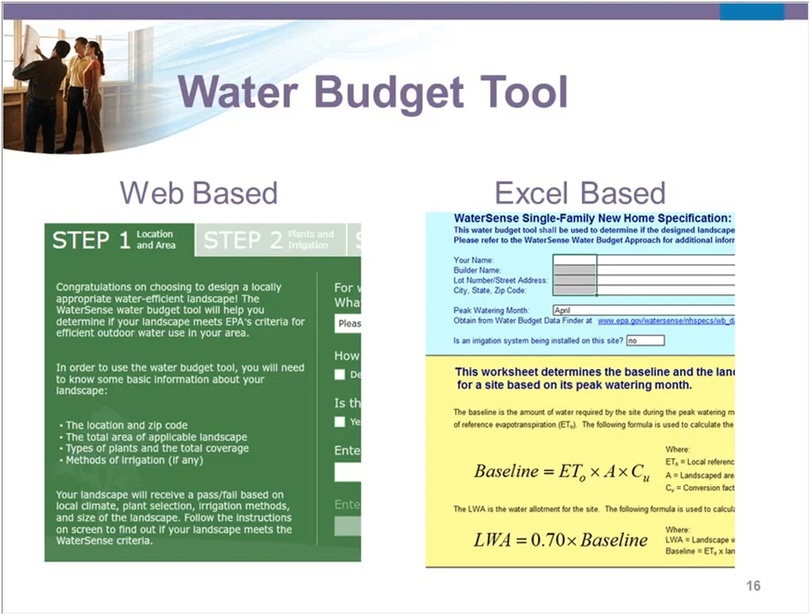The budget takes into account the plant types, the plant water needs, irrigation system design, and the applied water that the landscape receives either by irrigation or by precipitation. So all of these factors are taken into account.

The tool, in a nutshell, follows three main steps. The first step, the tool calculates the amount of water a standard landscape would require and the amount of water the design landscape is allowed in order to be considered water efficient.

So in other words, how does the reference landscape compare to the design landscape? That's what we do in step one. Next, the tool calculates how much water the design landscape requires based on climate, plant type, and the irrigation system design. And lastly, it determines whether the design landscape meets EPA's criteria.

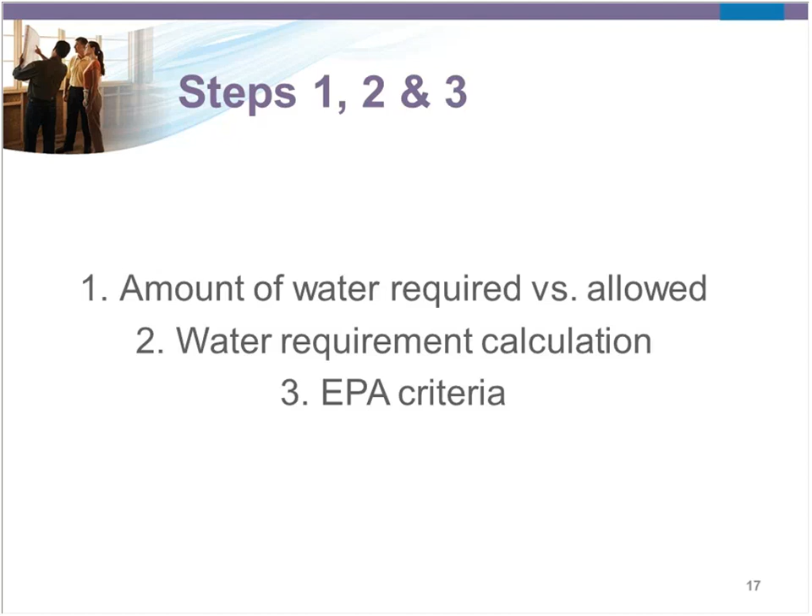Essentially, we're trying to see if the landscape really is meeting water efficiency standards. And we're going to talk in more detail about each of these steps. So what are some of the major factors that we take into consideration? There are two major climate-based factors, which are water use and performance.

So for comparison, through our products labeling side of the program, products in general must use less water while performing as well or better than the conventional models. So for instance, when we certify or label toilets, the requirement is that they become at least 20% more water efficient while still performing just as well as a standard toilet.

And so following this model, performance of the landscape can be judged by the presence of healthy plants and, of course, the ability to meet expectations for both how the landscape is functioning and the way that it looks, so all of its aesthetic effects. One thing that is very important to note is that every plant will have access to the water that it needs. Otherwise, that's going to affect both the aspect of performance and of aesthetics.

So we want to make sure that even though we are being water efficient in the landscape, we're still providing enough irrigation so that we have green plants.

For the purpose of this specification, it was decided that we would implement this through a performance-based compliance approach, that way allowing more flexibility and ease of meeting the criteria.

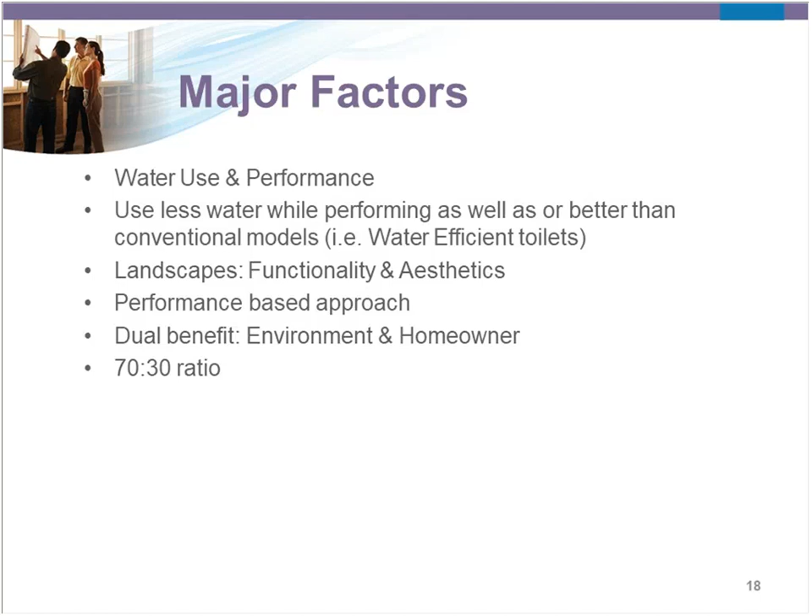And finally, the data are conservative in nature in order to result in a landscape that's capable of withstanding the most challenging months of the year. So though we're wanting to save water, we don't want the landscapes to burn out in the hottest months throughout the summer.

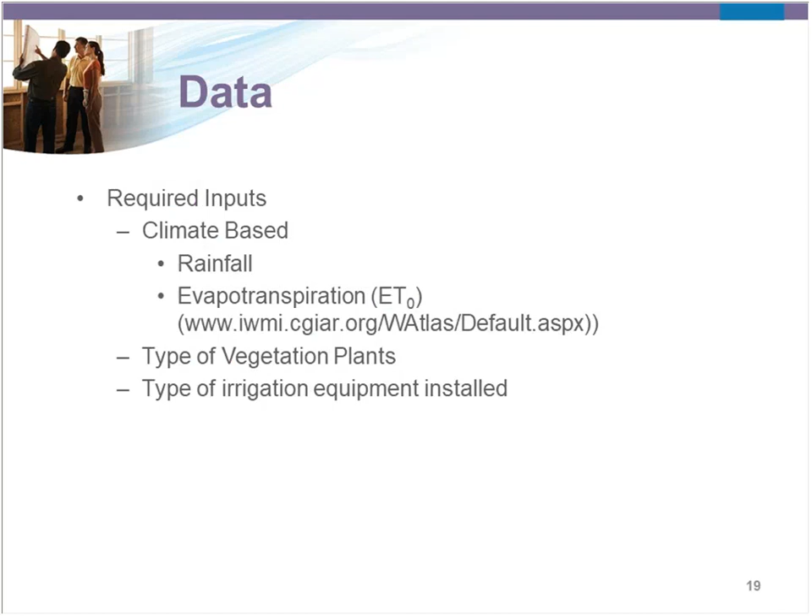So looking into the data, what are the required inputs that the tool functions on? The two climate-based inputs are rainfall and ET. ET is captured at IWMI, that's where we obtain the national values for ET. And these two climate inputs are local reference for every region. The tool also, of course, considers the type of vegetation and the type of irrigation equipment that is installed.

So a little bit more about ET. One of the things that WaterSense took into consideration in order to make the tool easy to use was to have a standardized set of data that covered the entire country. So while we have access to local resources for rainfall data and other sorts of climate data, ET data sources are pretty scarce.

So we went to the International Water Management Institute, which is the website that you see here on this slide, and they have a climate atlas that has data ranging from 1961 to 1990 from weather station data across the world, and they model monthly summary data for a number of parameters, including ET in our case.

The US data that we extracted was summarized with the average value for each zip code using ArcGIS. And in order to be consistent in both the actual data and the process that we used to model it, we also extracted the precipitation data.

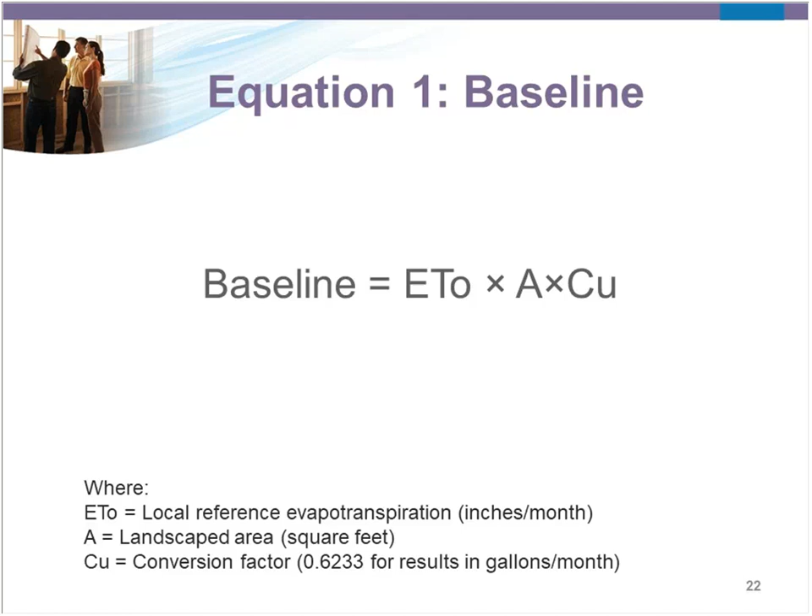So that's for our first step. Our second equation is the landscape water allowance, also LWA. We're basically multiplying the baseline, which we obtained from the previous equation, times 70%. What this equation results in is the amount of supplemental water that's allotted for the designed landscape.

For purposes of the specification of the LWA, 70% of the baseline is the amount of water that would be needed if the entire landscape was covered by a well-maintained, average height green grass. The water budget method assumes that all plants will require some amount of supplemental water.

We've just assumed that a landscape will have a variety of vegetation that have different water needs. And then for our third equation, this is the landscape water requirement. We'll go through all the variables quickly. The landscape water requirement for each hydrozone, which we'll explain a little bit later, is expressed in gallons per month.

Then we have our distribution uniformity, which is the lower quarter distribution uniformity. ET being the local reference evapotranspiration value. K, the landscape coefficient for the highest water-using plants in the hydrozone. R, the allowable rainfall, which we've designated as 25% as being the actual usable rainfall. And C being the conversion factor, so that we could have our results in gallons per month.

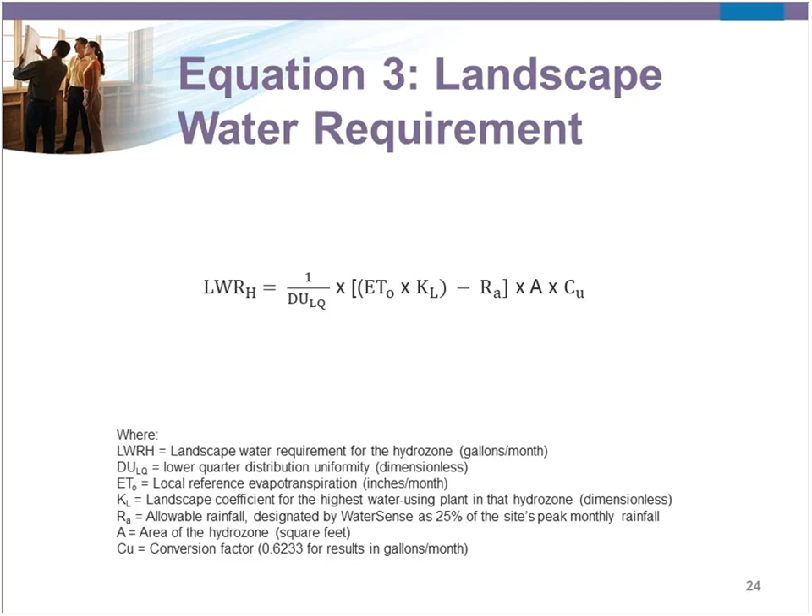So that is our final equation. Now we can move on into the actual demonstrations. First, we're going to go through a demonstration on our Excel-based tool, and then we'll do another demonstration on our web-based tool.

This is what the first page looks like for the Excel-based tool, for those of you who are familiar. The blue sections are usually the sections that require user input and basically contain default project information. The yellow sections are reference information, and gray sections, which we'll see in the next slide, are meant for input.

One nice thing about this tool in comparison to the web tool is that you get the opportunity to see the background information behind the tool and understand the more technical aspects of it, which is kind of nice.

Then you move on into the gray area where it's going to require all of the inputs. For step one, we're entering the landscape area in square feet. For the sake of the demonstration, we're working with a landscape of 5,100 square feet. Then we enter the average monthly reference ET, which in this case is 6.25. Within the tool, you'll find a link that will take you to the database where you can obtain that based on your location.

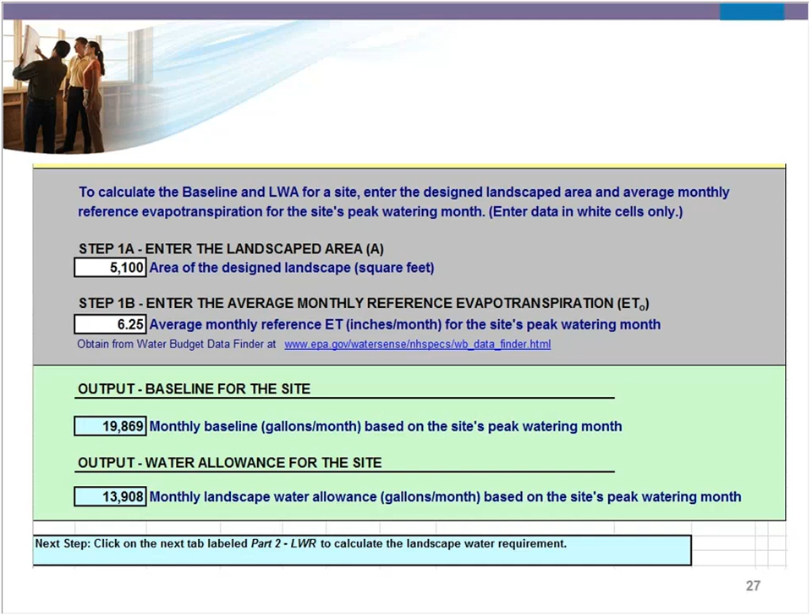Like it says here, it's based on the site's peak watering month, so this is the hottest month of the year. Then we move on to step two, where we're going to go ahead and calculate for our LWR, again based on our peak watering month.

The first entry that you make is enter the average monthly rainfall of the site. Again, the link is provided where you can obtain those data points. It's 1.68 for this specific site.

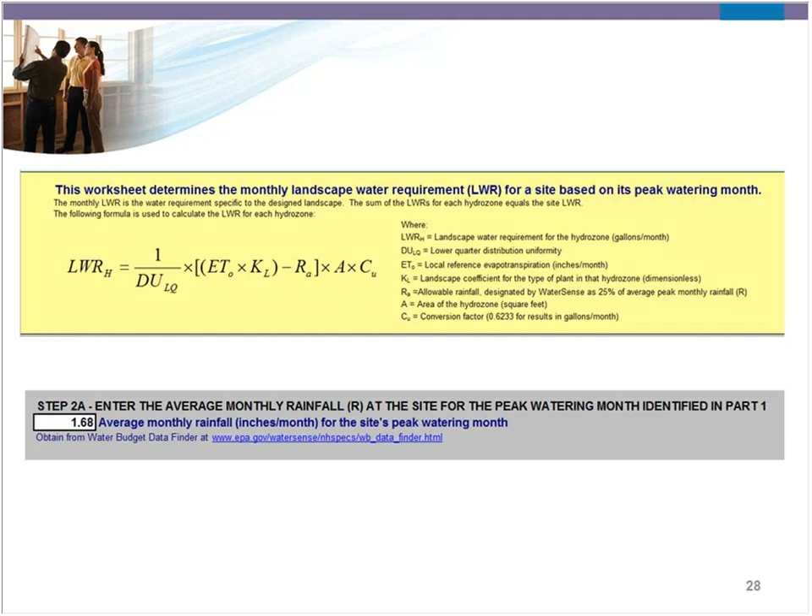Then it takes you to the second part of step two, which is to include all the different hydrozones that make up the entire landscape. Essentially, you're breaking up the square footage based on the type of landscaping that you have, and this number needs to equal your original landscape number that you put in step number one.

So here you have the opportunity to break it down. In this case, we have 2,438 square feet of turf grass with medium water requirements. The landscape coefficient for this is 0.7. The irrigation type is fixed spray. The DU is 65%, and it calculates the LWR for each specific hydrozone.

And so it continues to go down. We have a mixture of shrubs with low water requirements. Its K values — all of the shrubs have been assigned drip standard irrigation with DUs of 70%. And as you see, their LWR values.

And finally, this is sort of our backyard: 450 square feet of ground cover with low water needs at a 0.2 coefficient, also with drip irrigation, 70% DU, and then finally our turf grass. So like I said earlier, we calculate all of these totals and obtain one whole number for the landscape water requirement for the entire landscape.

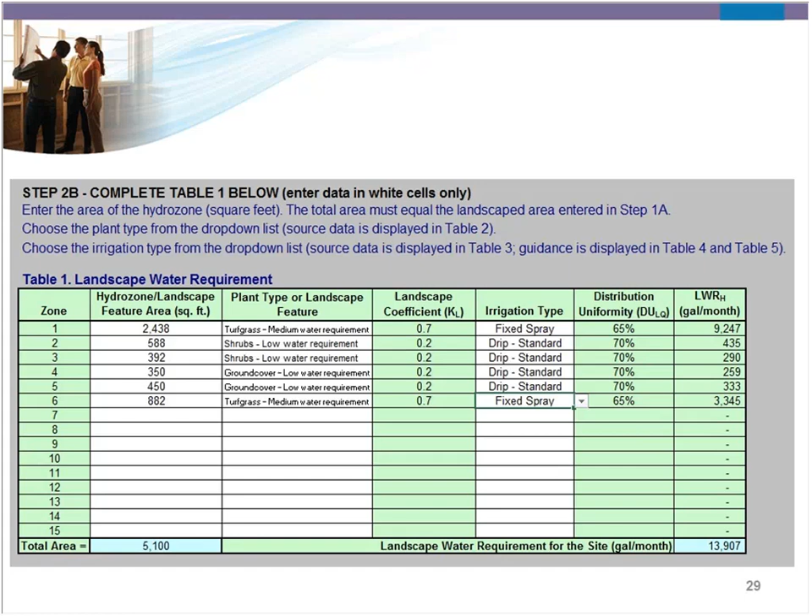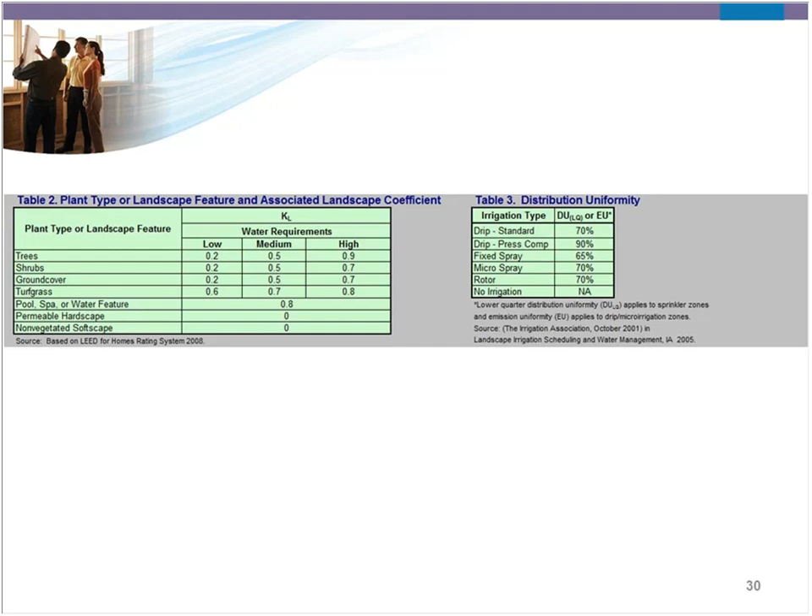Before we get our results — and this is only in the Excel version of our tool — you'll also have access to all of the tables and charts that break down the values that you're inputting in the previous table.

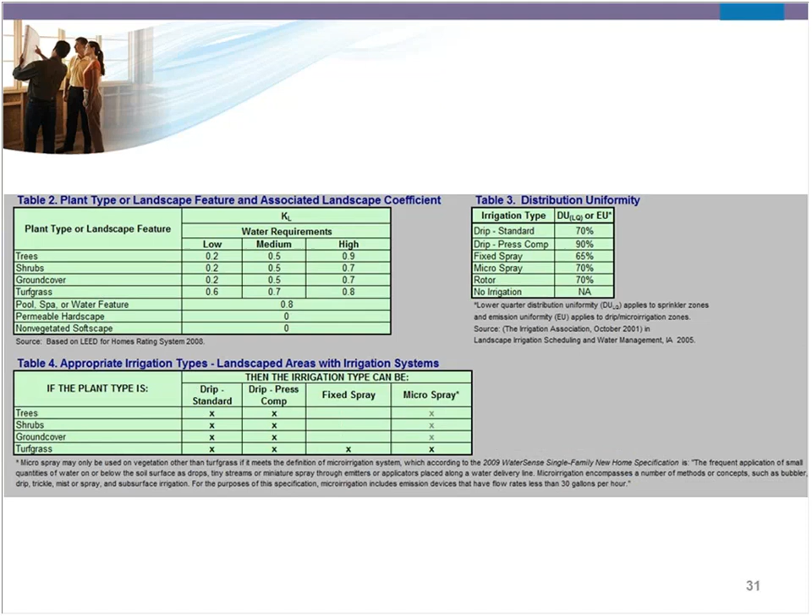Based on plant type, you find your K values. Based on irrigation type, you find your DU values, and then a reference table showing you the appropriate irrigation types for those areas that actually have irrigation systems. Based on all of those inputs, we get here our water requirement for the site, which is 13,907 gallons per month.

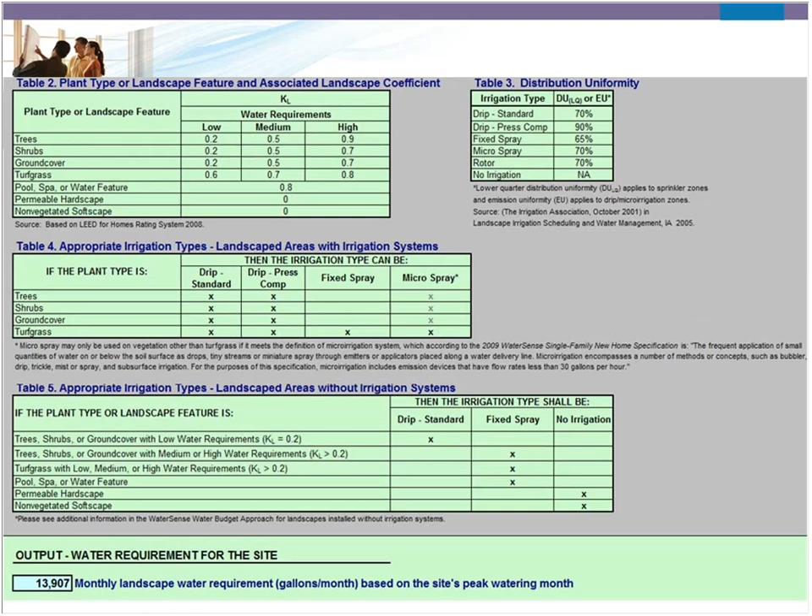And then in step 3 is basically our summary of all of the calculations that we've put in. So our LWA is 13,908 versus our LWR, which is 13,907. And based on this, it'll automatically tell you whether we have met the criteria for water efficiency or not. And in this case, it has been met.

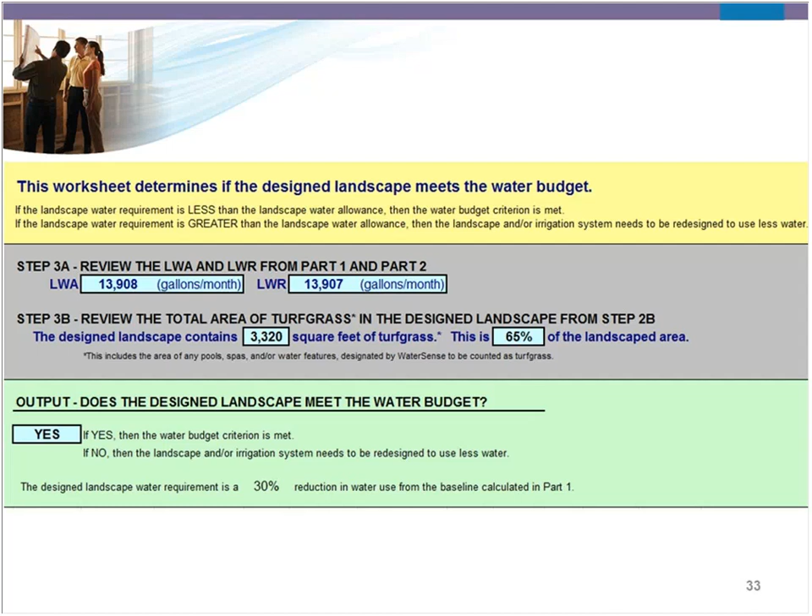So that's a little bit of a quick overview of how the Excel worksheet works. And now we'll look at the web-based water tool, which essentially is the same as our Excel, it's based on our Excel sheet. It just has a different interface, and both tools can be found on our website. The Excel sheet can be downloaded from our website, and this one is basically live, so you can just work on it.

One caveat about our tool is that if you're trying to work through different iterations of landscaping, we don't have anywhere to save it or keep it in store for you. So you could either, and we'll see this in step 3, print out PDF formats of reports for each iteration, or what I do is take screenshots until we decide what landscape combination we're going to go with.

We are aware that this is something that our users have sort of asked us for. We recently updated our website and are currently undergoing a revision for our home specifications. So the tool is really something that we haven't wanted to invest many resources into, mainly because we know there's going to be changes in the program in general. So we are aware of it, and we should be doing something about it in the future.

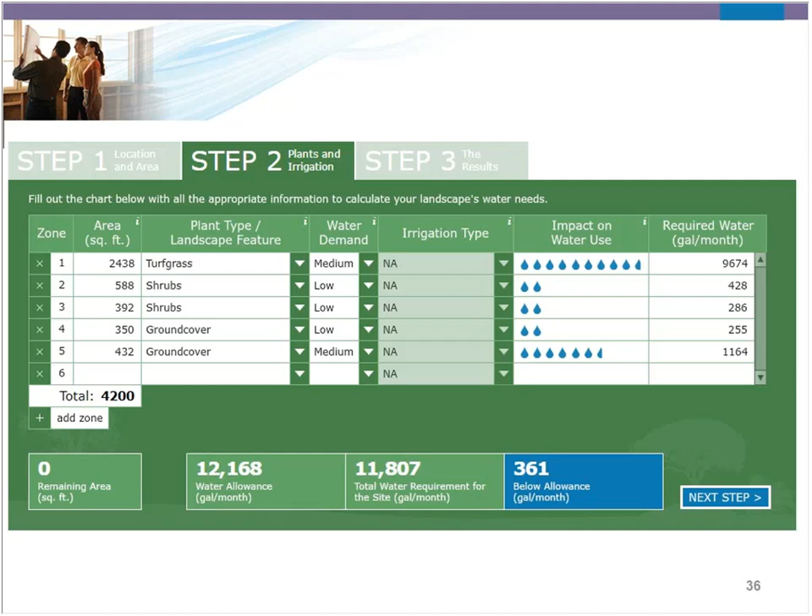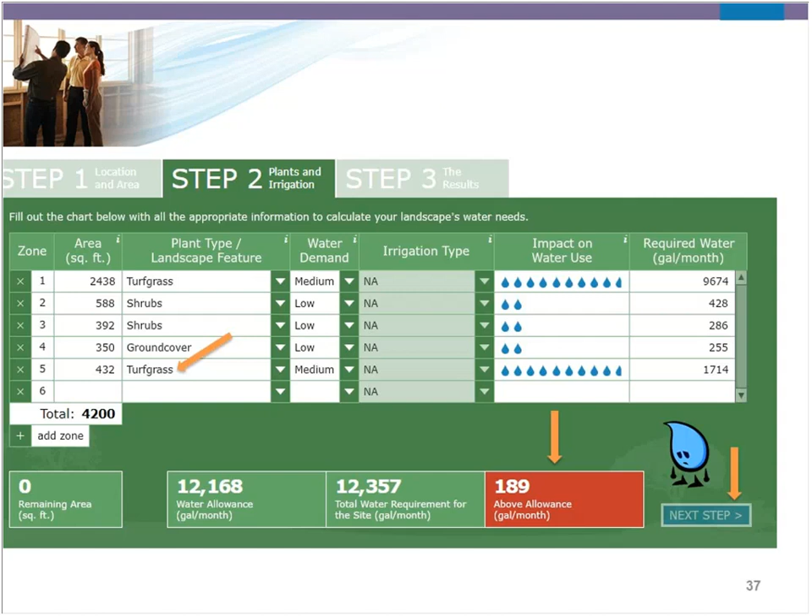In the first scenario where we did meet the criteria, this is the next step, or the next screen you see in step 3, where it gives you a summary and allows you to input your information to obtain a report on your calculations. That's a pretty quick overview of our web-based tool, which is pretty simple besides the little caveats I mentioned earlier, but basically gives you a good overview.

Moving on, this is just to give everyone a general feel of how the tool functions throughout the country. We set up a few scenarios with different variables to test out and see how the same criteria would apply throughout different regions of the country.

So this model assumes a landscape area of about 6,140 square feet. It has 100% vegetative cover, so there's no hardscape. There are only two categories of plant types we're considering, defined by the coefficients and the DU values. All the turf grass is irrigated, and the ones that are irrigated use a fixed spray, which is why you see the DU is 0.65 for all of them.

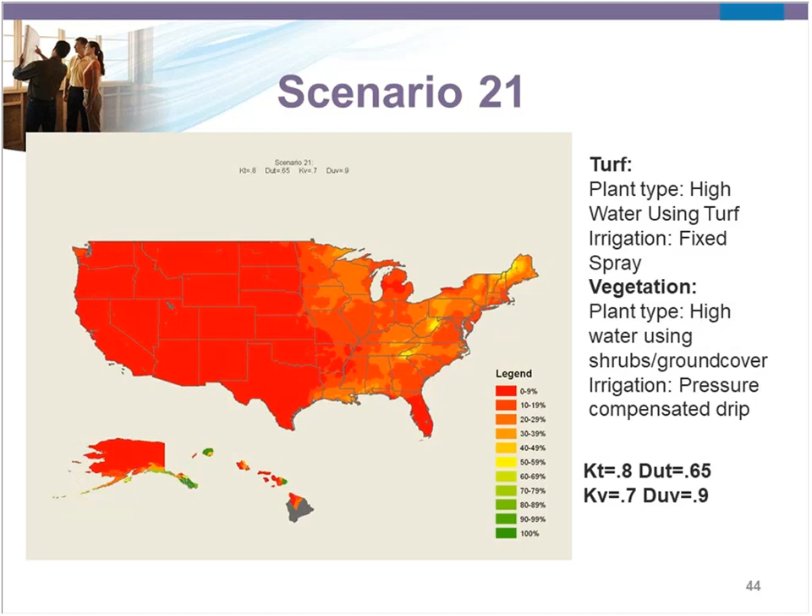Some interesting insights we found from working through these scenarios: if we go back to scenario 1, there's really no place in the country that can't achieve at least 60% turf in scenario 1 or 2 while still maintaining some efficiency. That's a really positive outcome from this exercise, just realizing that our requirements really aren't that strict, and it's possible if we use the right mix of both landscaping and irrigation systems.

Another observation was that over 35% of the country can actually achieve more than 90% in scenarios 1 and 2. So if we were to be really efficient throughout the country, 90% proves to be a pretty good number.

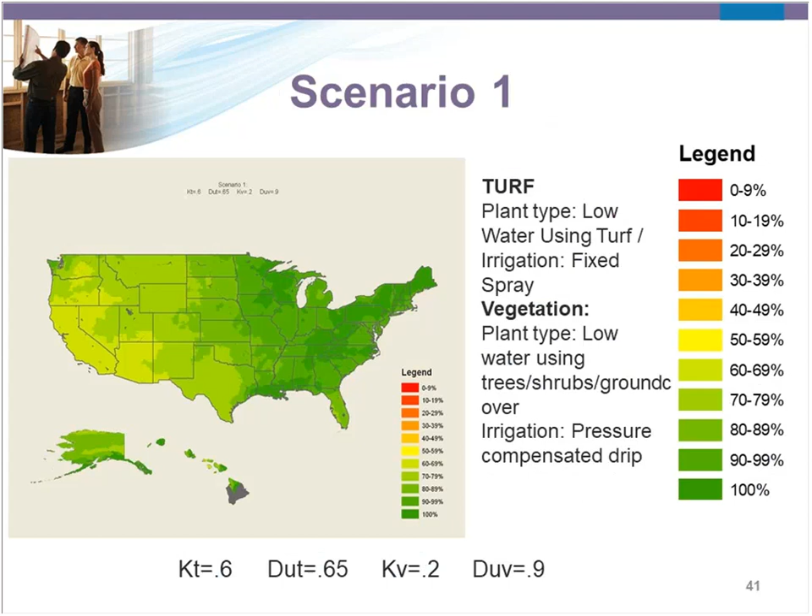And then in the mid-ranging scenario, something like scenario 19, where we have high water demand turf and medium demand vegetation, a mixture of trees, shrubs, and ground covers, we see that about 33% of the country could achieve more than 40% turf. So that's still pretty good.

So we really don't want people to believe that we don't want turf to be installed, or that we think it's a bad idea, but rather, using it in a sense that can still reach some water efficiency standards.

And in our most extreme case, I thought this was fun - scenario 24, where most of the country is basically red, we found that even then, at least 0.14% of the country can achieve 100% turf. And of course, this is all just in the Alaska and Hawaii region. So that's still a little bit positive, gives us some hope that even in the worst case scenario, we can still have some areas that are water efficient.

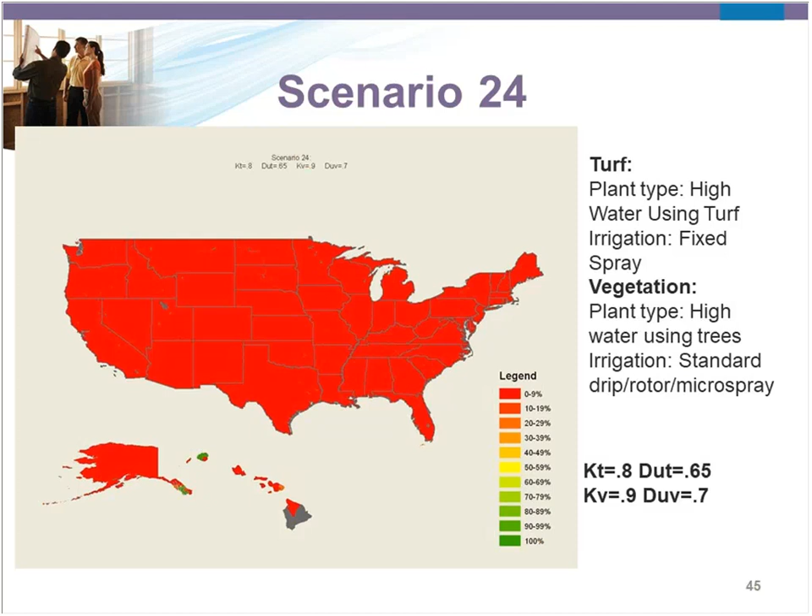So that was it for the scenarios. Before I jump into the water efficiency rating index, Brett, I'm going to ask you if you wanted to tie in the previous information into LEED, or if you'd like me to just go into this.

Why don't we - there are some questions about the tool. Do you think we can quickly go through some of those, and then we'll wrap up?

Absolutely, great. So can you just speak briefly about how this could be used, or can it be used in regards to multifamily or even commercial building landscape plans?

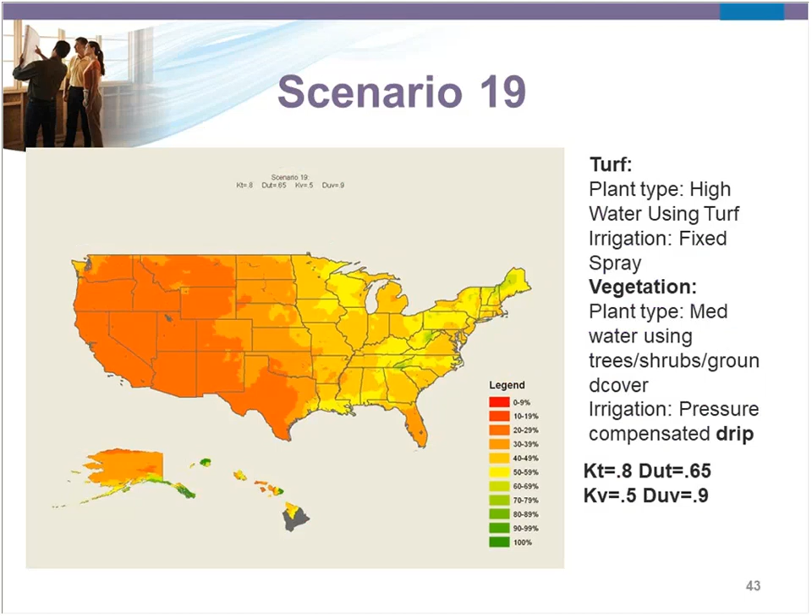Yeah, absolutely. So even within the tool, and you'll have to forgive me, I always gravitate to the web-based tool, mostly because it tends to be more user-friendly. But if you are doing multifamily, you do have the option here of whether this is a single site or if you have various sites. I guess in this case, if you're doing multifamily in terms of a high-rise, that would be treated as a single site, just because it's all in one place.

But if you're doing multifamily as far as like a community, sort of like a gated community, single-family homes, then this is when you would choose the development of multiple landscapes in this area. And then as far as commercial sites, though we don't have a certification program or specification that focuses specifically on commercial, I really don't see, as far as using it as a reference and a resource, why it wouldn't apply, mostly because, like I mentioned earlier, it's based on zip code, so you'll be able to pull from the data based on where your site is, regardless of what type of building you're working on.

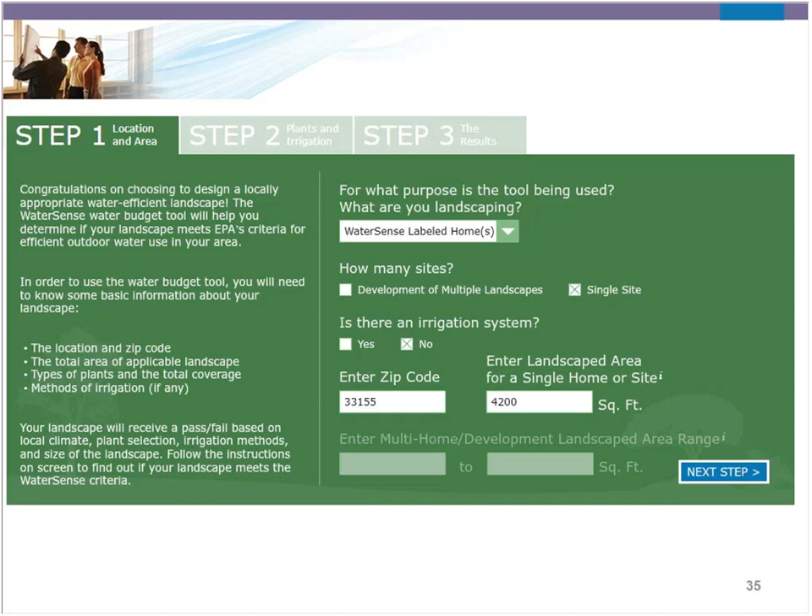Let's jump ahead to the WER index. For those familiar with ResNet, the WER index is an effort to start incorporating water efficiency into these rating efforts. A lot of us in the construction and building industry know HERS is a guiding force in efficiency, providing a baseline or grade for how efficient a building can be in energy terms. There was an opportunity to dive with the same mentality into water—to create a database and start to populate a comparison of how efficient buildings can actually be. The index, compared to the water tool which focuses mainly on outdoors, incorporates both indoor and outdoor water use. In this slide we've noted some of the steps taken for development of the index, which is really in its infancy right now.

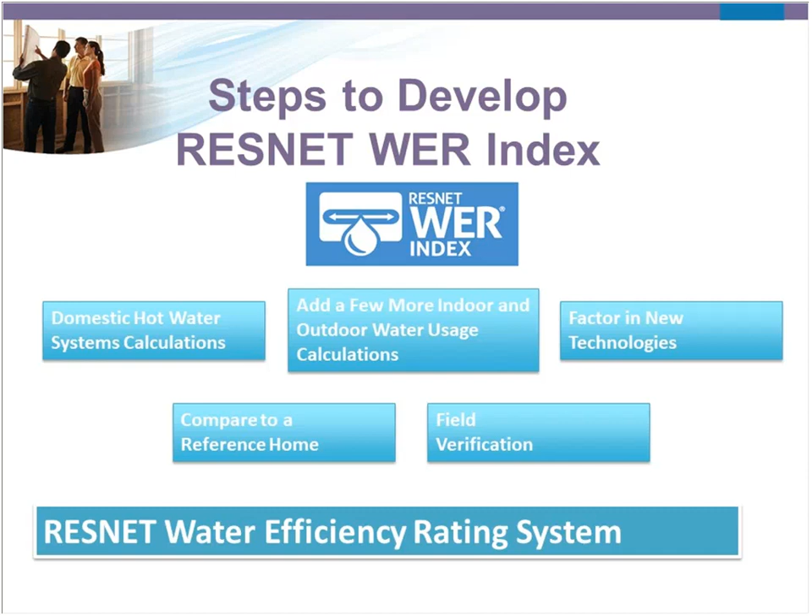Some objectives when the WER index was being developed: that it would be applicable nationwide, suitable for both new and existing homes, that it would take into account indoor and outdoor water efficiency, and that it would be practical and affordable to administer. And of course that we could obtain a quantitative comparison based on other buildings alike throughout the nation. This hasn't really been out in the industry yet—it's ResNet's first take on implementing it. It was out for public comment earlier this year, and I believe the final version should be out by the end of 2017. We're pretty excited about that.

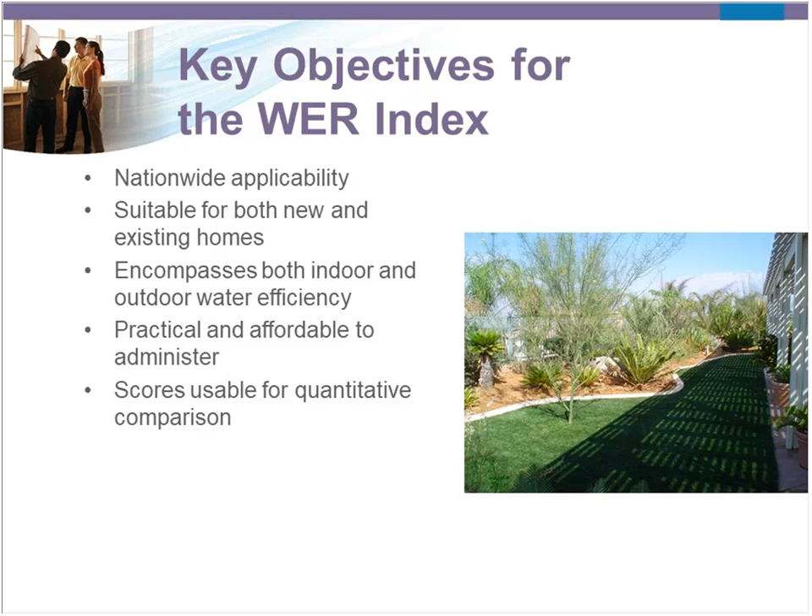The way it was developed: RESNET brought together an interdisciplinary committee of 13 members, 3 co-chairs, including a builder, a policy analyst, and EPA. That committee was broken into task forces—one looking into the modeling and development of the reference home, so what these homes would be compared to; another committee focused mainly on indoor water use; another on outdoor water use. These committees dug into how each of these should be calculated. And a group looked into rating and inspection procedures—how we're going to decide whether a building is water efficient or not, and how professionals are going to buy into this process.

For the reference home, these are some of the factors that were included, and a lot of this was modeled after HERS, which is the energy version of the efficiency or the rating score.

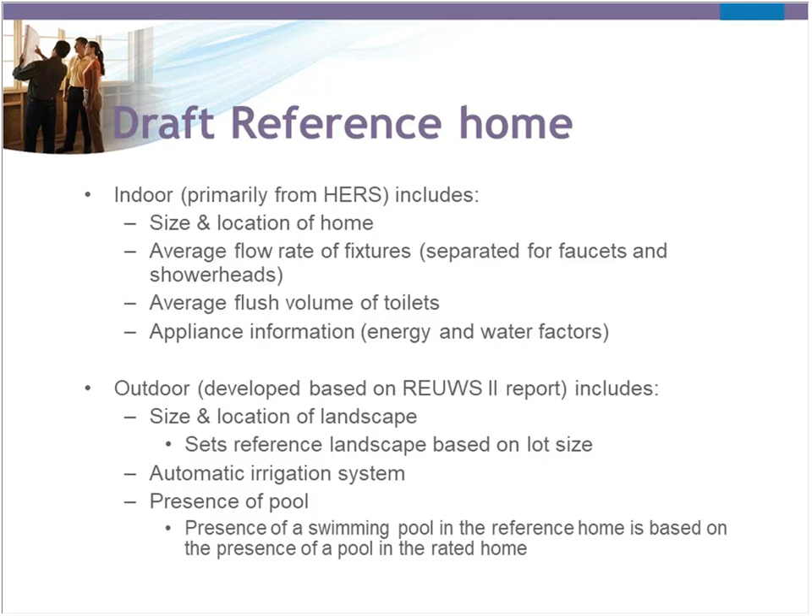The pool really needed to be incorporated into the reference home because it has such a high rate of ETo. Within the reference home, we believe both the indoor and outdoor models provide good statistical background, and they're both representative of current construction practices.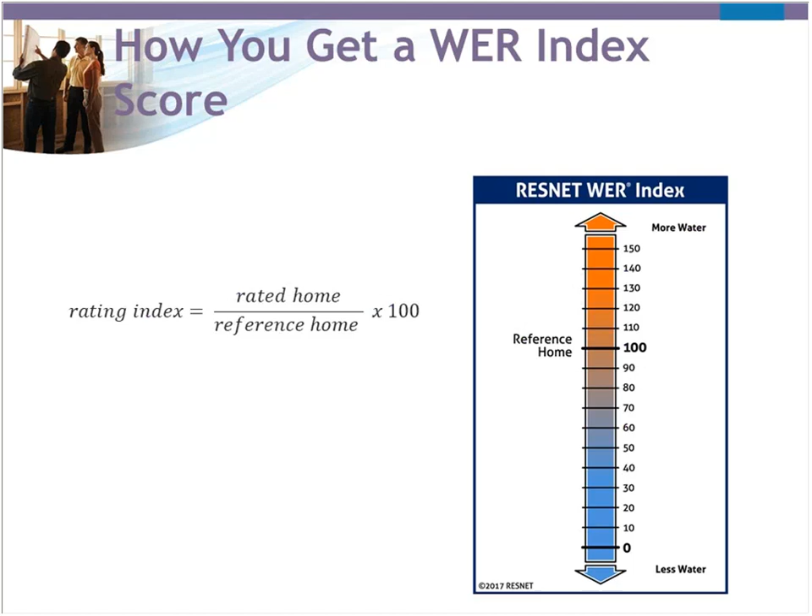Essentially, the index compares the rated home versus the reference home, multiplying it by 100 to provide a score. Anything lower or closer to 0 is most efficient, anything above 100 is using more water than needed. This is just to compare how it works with the HERS rating system.

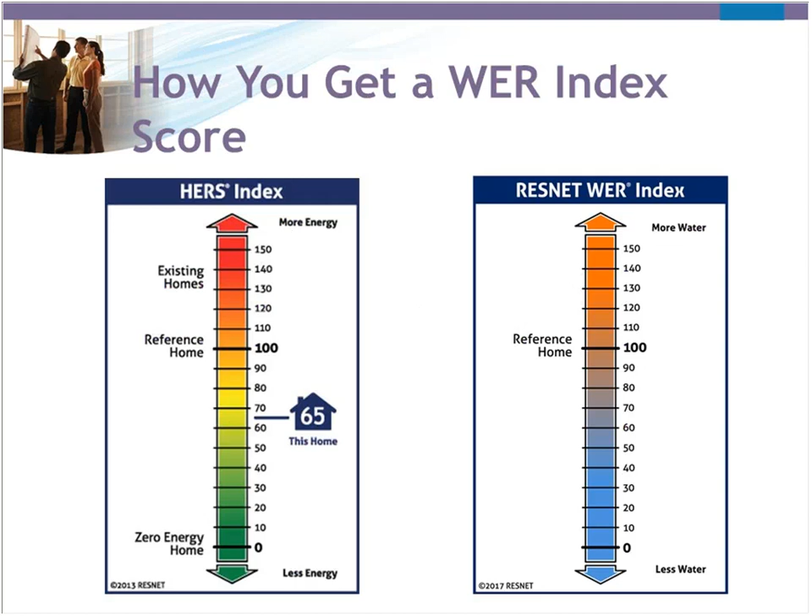It was important, one of the most important parts of the development, that this rating index would work well in collaboration with the HERS index. That's kind of it in a nutshell. So I'll let you go ahead and loop in with LEED, Brett.

Great, thanks, Olga. Just to be quick, can anybody who's interested participate in any more public comment on the WERS, or are there any more opportunities coming up? Should they go somewhere to get involved?

Yeah, you can definitely go to the RESNET webpage. They always make announcements about when they're opening for public comments. I believe the first round is already closed, but I think later in the year they will be open. I know ICC has also set up a committee, and I'm sure they'll be putting out requests for comments from their end. Great, thanks.

So just to wrap up here, the water budget tool is a potential major part of the new LEED for Homes version 4 rating system. Just to give you some background, the 2008 version used a very clunky version of the WaterSense budget tool before it existed.

You had to have a landscape architect or someone who's been in the field for 10 years come and verify your project, come up with all the different calculations, the ETo, the local precipitation, and all that. They had to fill it all in, and then that had to get submitted to USGBC a month early before you could even finalize the project.

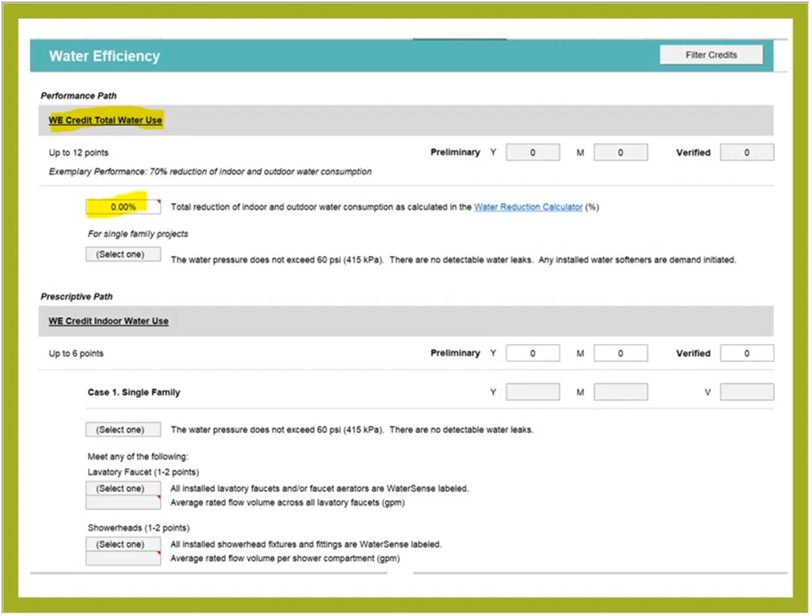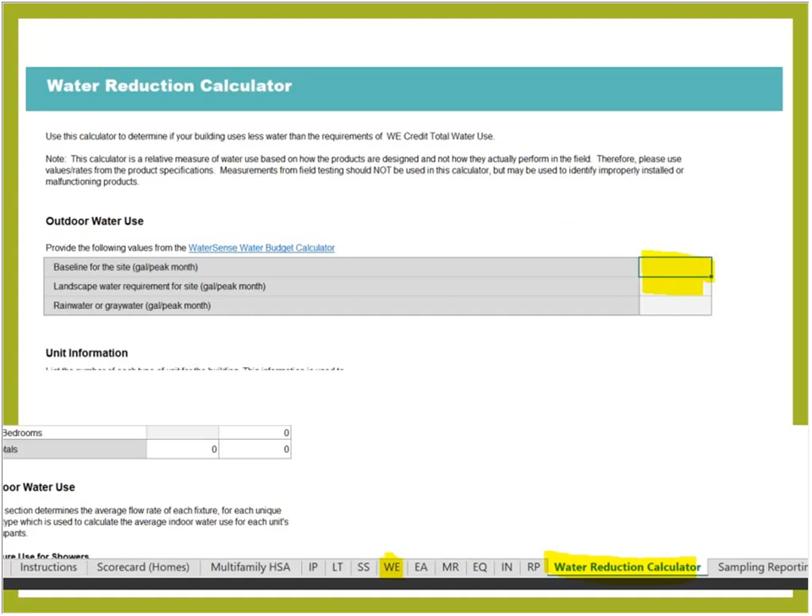So I took Olga's version here, the one that failed actually, just to show a point. You can see we took the 12357 total water requirements and put it down here in the baseline, and we took the 12168 and put it in the gallons peak per month for the landscape water requirements. So you can match up those outputs right here.

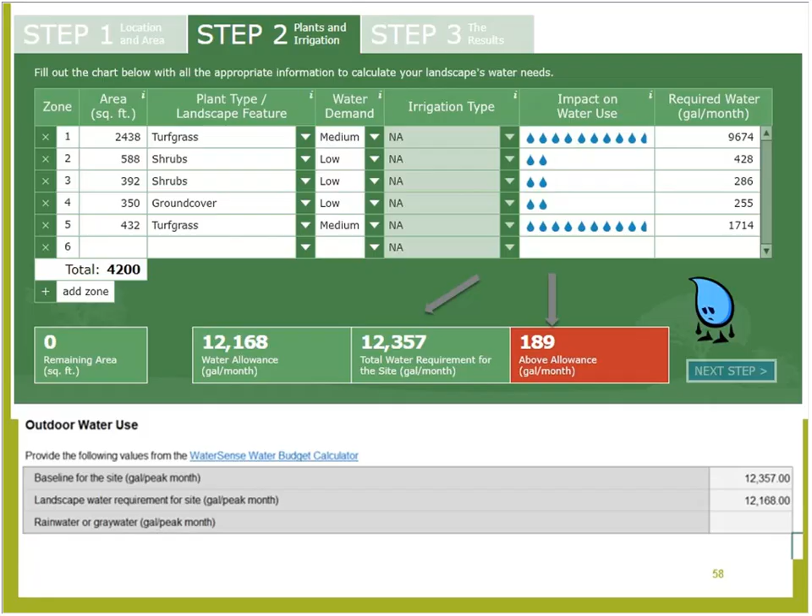Then if you scroll down to the bottom, you can see here is your indoor or outdoor water savings - we didn't do indoor for the sake of this webinar. And you can see it's 1.53%, so even though it failed, it does add to that overall reduction.

LEED isn't looking for you to meet WaterSense by any means, but if you don't meet WaterSense, it'll be very difficult to get points unless you're taking a lot of those points from indoors. This is just a quick example of the water budget tool, required if you're taking the performance pathway, and how it fits into the overall 10 through 70% reductions you need in water usage to score in the performance pathway.

I'll say this too with LEED - we've had a few project teams using the online form, but they went through 10, 20 iterations of the landscape plan. When I showed them the Excel form, they were like, wow, I didn't know this existed. So definitely get that Excel form, get really engaged early with the landscape design professional.

If you can get engaged, just like energy modeling, you want to do water modeling really early to help your clients save money and maximize the points. Don't think of it as an afterthought where you try to fit it in later at the end - that will make it very difficult and may compromise your certification. Get that Excel format, create these, and make change iterations - that's what it's there for. There's no cost to it.